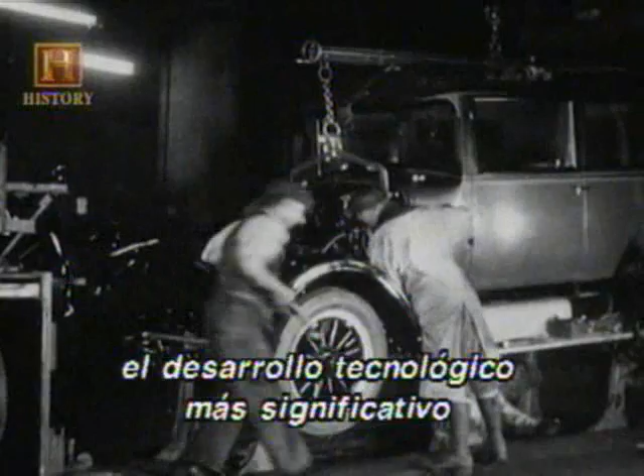I think the assembly line is the most significant technological development of the 20th century. Nearly everything that we use, we would not have it in the quantities we have it and at the prices we have it without the assembly line.

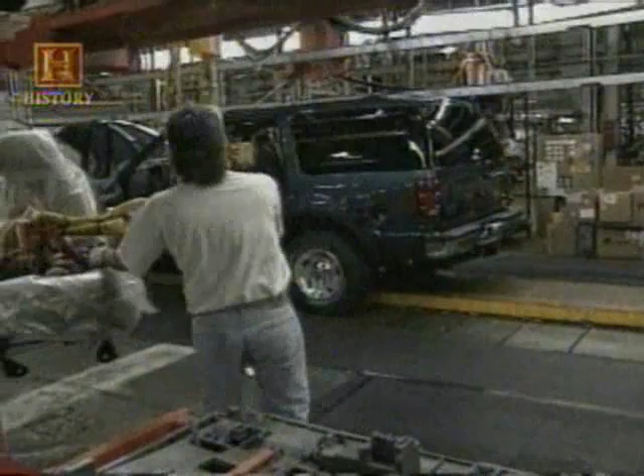I think the best way to define an assembly line is the way Ford did. He called it progressive production. Work moves to the person and moves past the person rather than the person going to the work. Parts are added until you come up with a final product. And that's what the assembly line is, essentially, work in motion principle.

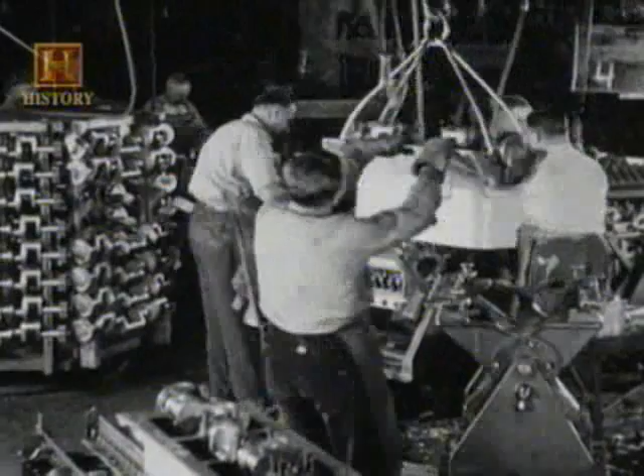Industrial society was highly advanced at the time the assembly line came into being, but once it came into being, it was so productive that very few things were made without the line after that. There are several factors that went into the making of the assembly line. The first had to be that the parts of any product that would be made on an assembly line had to be interchangeable.

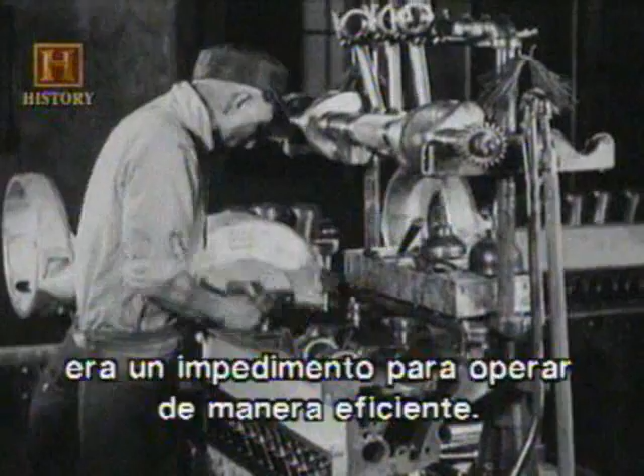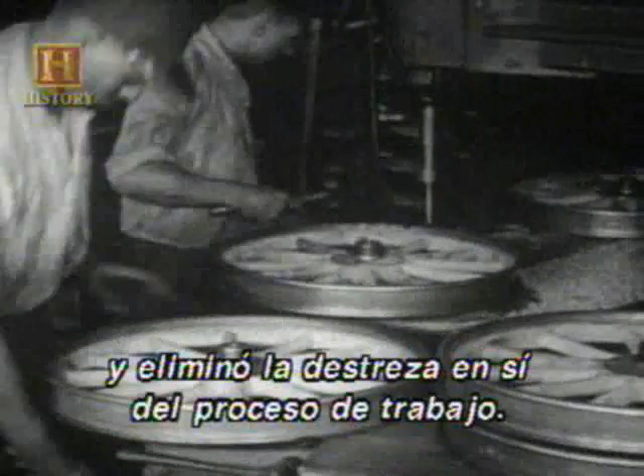Effectively, he Taylorized the work and took the skill out of the work process, dividing the labor, subdividing it again, so that a workman would do a smaller and smaller part of it. And doing the smaller and smaller piece of work, he could do it faster and faster.

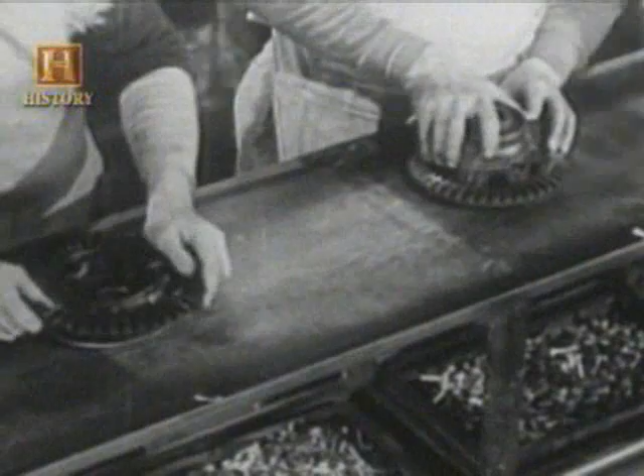Then they said that if this works with transmissions or it works with magnetos, what about engines? What about front axles? What about rear axles? And eventually they got all these subassemblies on the assembly line.

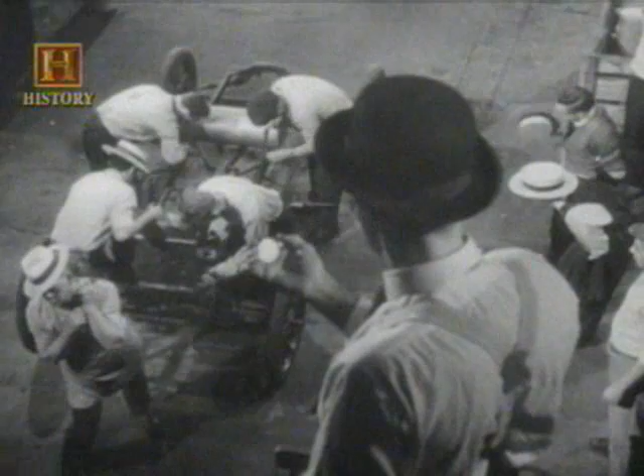Ford and Ford's engineers took all of these ideas and brought them all together and created what we think of as the modern assembly line, but it was really an amalgam of all sorts of other ideas, but nobody had ever tried to put them all together and use them to put together something as complicated as an automobile.

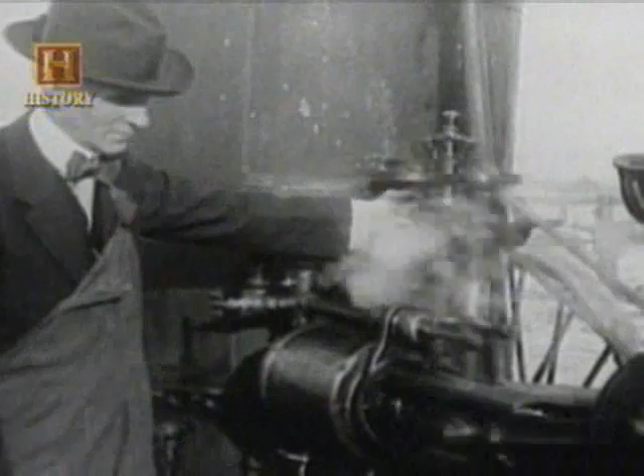Wondrous technology of the assembly line effectively was its undoing relative to labor.

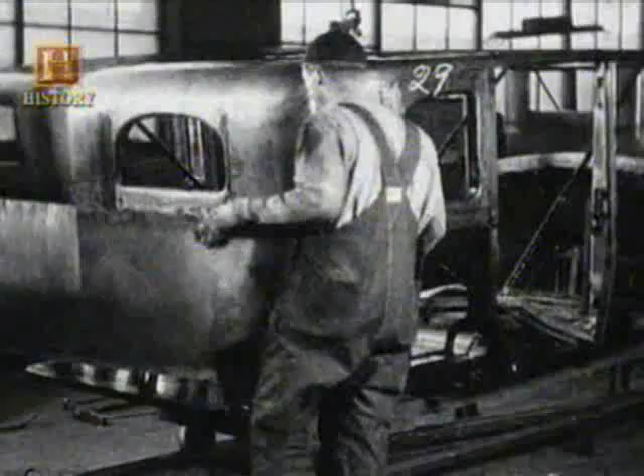It's boring, it's regimented, it's monotonous. It was very difficult to keep a lot of workers in these factories when they first started the moving assembly line.

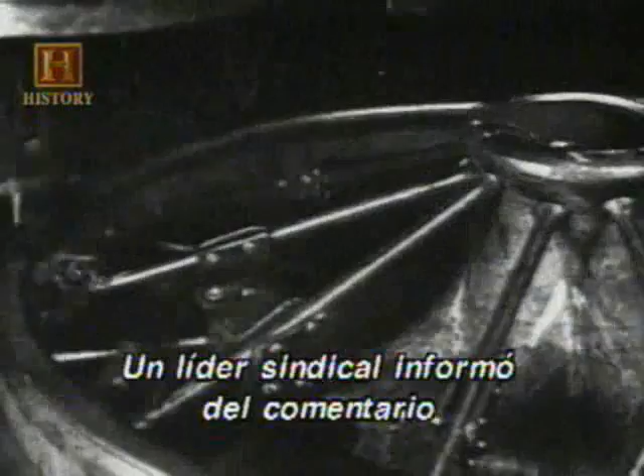A labor leader reported the comment of a Ford auto worker as saying, "If I have to put on nut number 86 more times, I will be nut number 86 in the Pontiac bug house." Work became degraded.

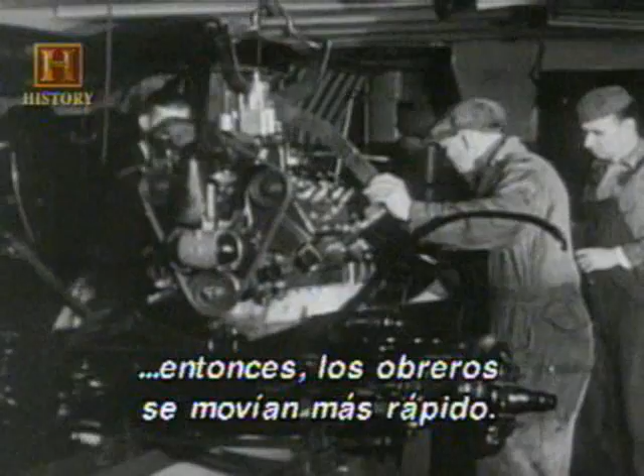A foreman in the Ford engine assembly plant talked about how in his shop, after they introduced line production, what he would do is he'd turn up the speed of the line a notch. The workers would move faster, turn it up another notch, turn it up another notch, and then the workers would scream and they'd turn it back one notch. They said we used to get 10, 15 more machines a day by doing that.

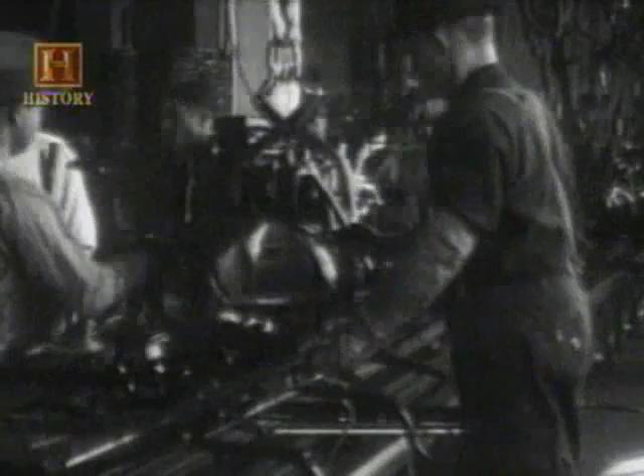Ford once said every part followed a predetermined place through the plant. If you had a person missing from that particular place, the whole system stopped. The Ford plant had 14,000 workers. With a 10% absentee rate, you have to have 1,400 extra workers to fill the assembly lines. People didn't want to do these jobs, and it required the bait of considerable increase in wages to keep people in those factories.

It worked. Turnover dropped, absenteeism dropped, and Ford workers sort of traded the high wages for the rotten work.

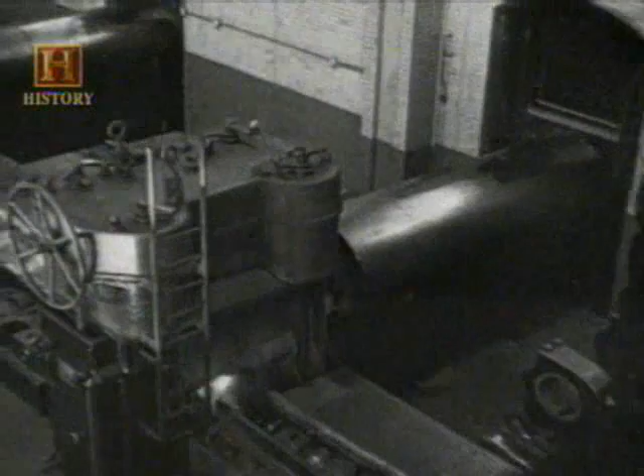I think what happens through the 1920s is that the line and the line speed and the regime of work in the factory becomes harder, faster, more ruthless.

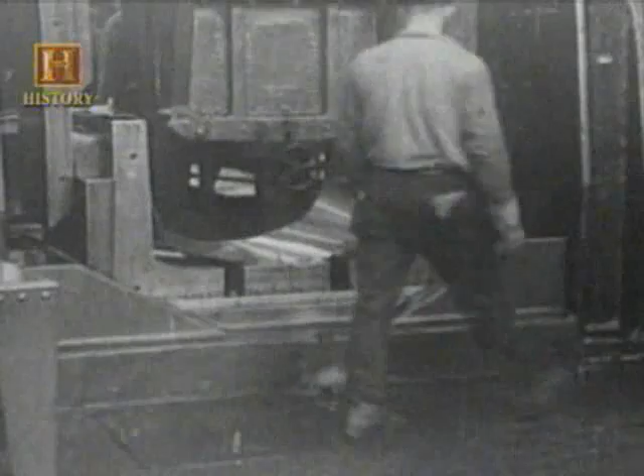Back in the days when he was a millwright, Ford Motor Company was the only company in the Big Three that had any blacks in skilled trades.

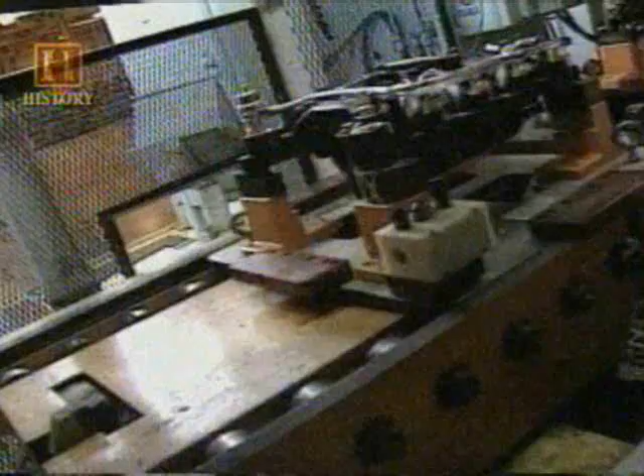He used to tell us some of the stories about some of the things that went on before the union got into the shop. If the production line was stopped for any reason, it was like an investigation, and it was nothing for a person to be fired, to lose their job, if they were found to be at fault. Prior to the union, if a person was seen spitting on the floor or smoking a cigarette, they could lose their job.

You had to take a little bit of everything. You got out there and did it. You could have been tired, you could be sick, but you had to produce. I came across an account of a woman who said that, my husband is not even allowed to leave to go to the toilet. They have a trough in the work area where he goes to urinate.

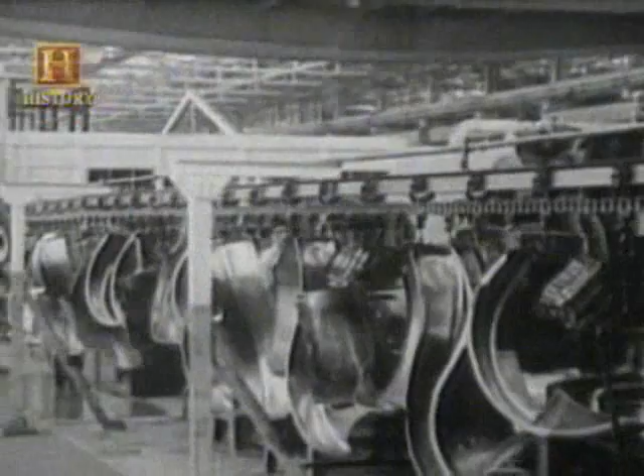First of all, it was a job. I had a job. The assembly line did a lot for a lot of people. It was a phenomenal thing, I guess is the best way for me to put it. The assembly line was a tremendous symbol of modernity, of productivity, of wealth.

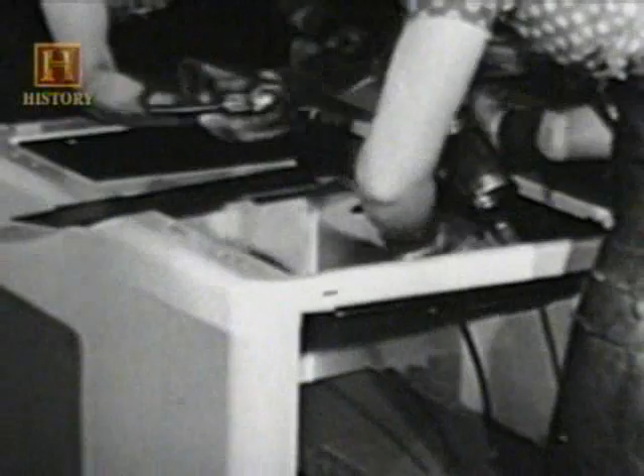There are new products coming on into the home, electrical appliances, which had been sort of experimented with at the turn of the century, but these were going in wholesale into American homes. You have companies like General Electric, Westinghouse that are beginning to make home appliances with moving line assembly.

The assembly line allowed not only more stuff to be made, but more complicated stuff, higher quality stuff, things like radios and phonographs, things that had once been fairly high-end, a kind of material abundance that people simply had never experienced before.

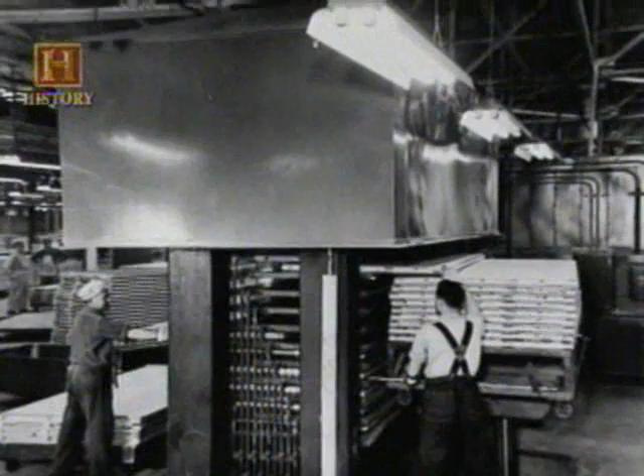Consumers, for the most part, have rejected mass-produced houses.

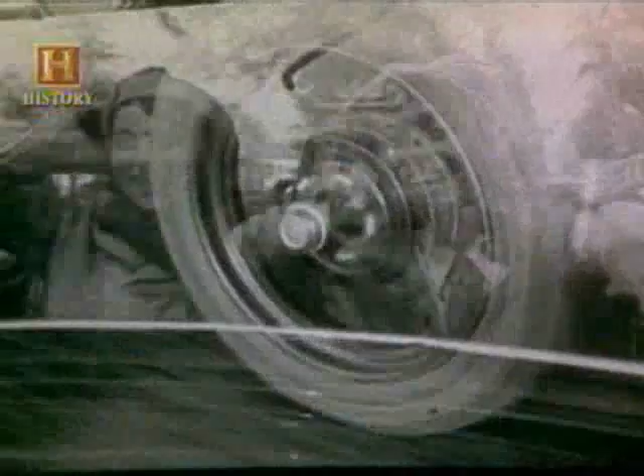We talk about car companies so much in this assembly line context because really that's where the assembly line was perfected and grew up, and it's where it matured.

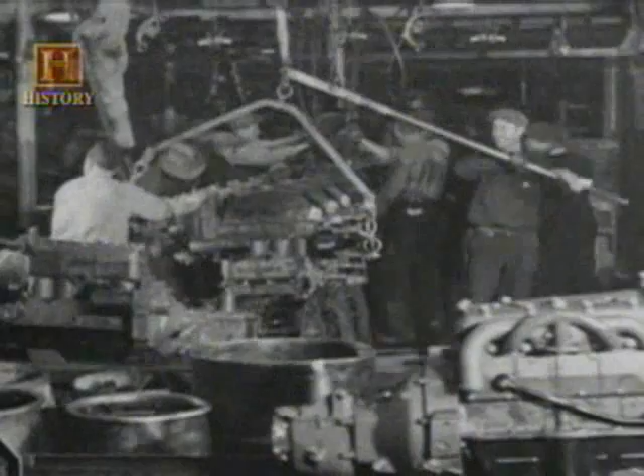It was an enormous, wrenching change to shut down his factories and retool them to produce the next car, which he called the Model A, a very different, much more modern automobile than the Model T. It was a colossal change for them.

Not only was it expensive, but there was also a tremendous personnel cost, and they threw a lot of people out, fired a lot of people, and brought in different people. When they begin to assemble the Model A, they have tremendous problems making the assembly line work.

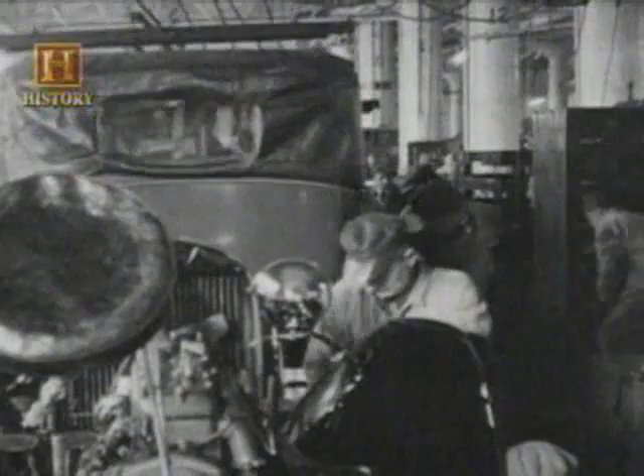General Motors was able to make those kinds of changes much more easily because they had never pursued things as far down that cul-de-sac as Ford Motor Company had.

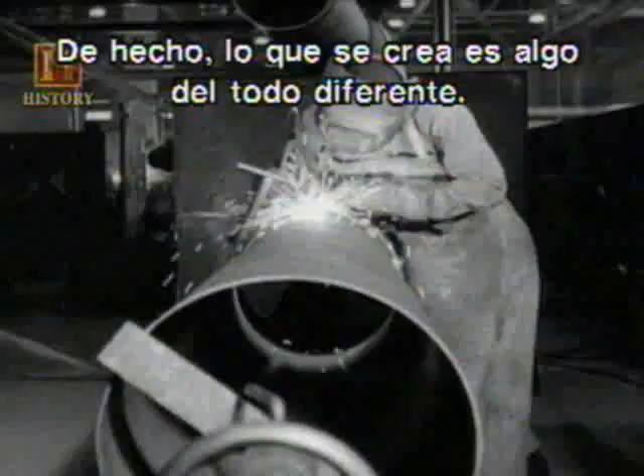Effectively, what you're doing is creating something entirely different. That process of conversion over to wartime industry is one where the whole shop floor is just literally in turmoil.

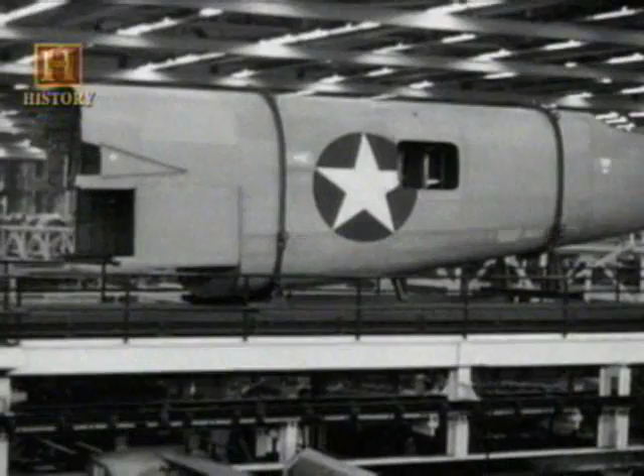If you look at the history of the war, you'll see that the United States created a tremendous amount of war material. World War II also sees the coming in of large numbers of women and large numbers of African Americans. Prior to that time, it was believed that neither women nor African Americans had the skills to work the machinery and the heavy equipment tied to the industry.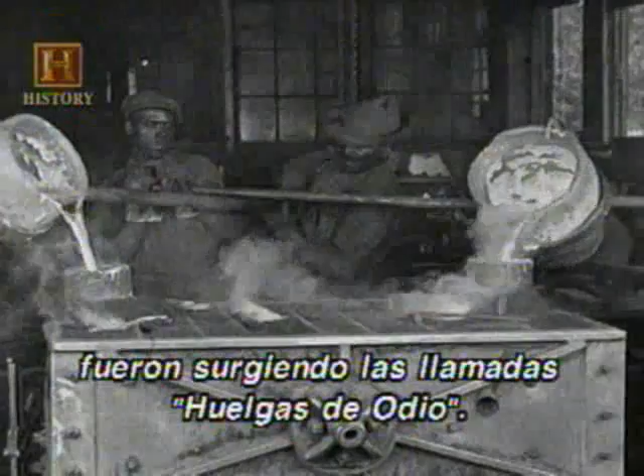There's a lot of contention in the auto industry through the war years. As African American workers are upgraded to the machines and the assembly lines, there are sometimes what are referred to as hate strikes - white workers who would go on strike because they didn't want to see the upgrading of African American workers. The same thing occurred with women workers sometimes.

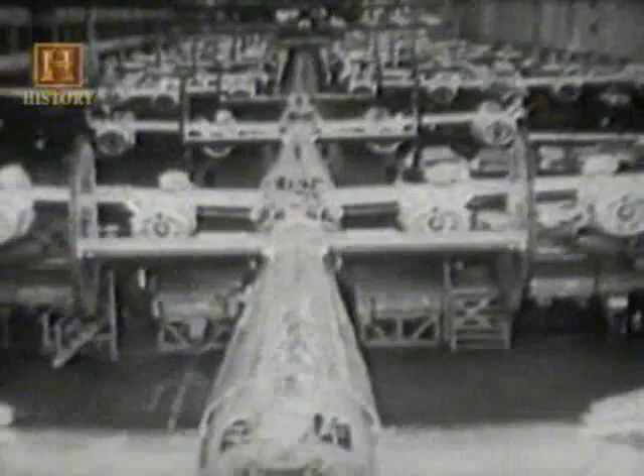One of the major reasons that we won World War II was because we were able to produce all kinds of war material, from tanks and airplanes to clothing and helmets, at a faster rate, at a cheaper price than any other nation on earth.

So we were able to build ships faster than the Japanese and the Germans combined could sink them.

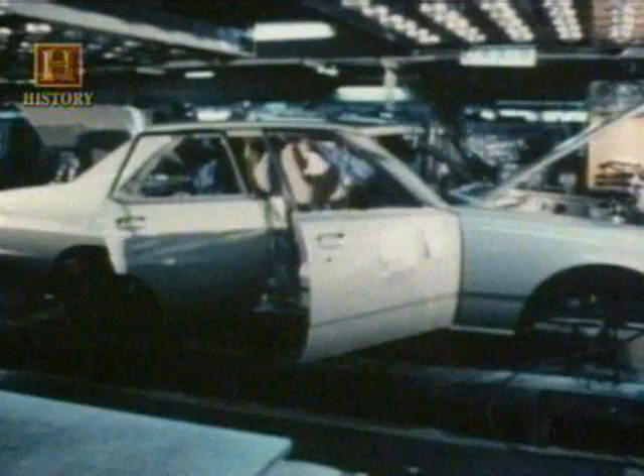I think you could say that Henry Ford invented the assembly line for the car, and that Toyota perfected it.

Después de la Segunda Guerra Mundial se decía que la productividad estadounidense era 8 veces mayor que la de Japón, que estaba devastado por la depresión y la inflación.

The Toyota situation in the post-war period, back in the early 50s, they really had nothing in terms of resources. It was a resource-poor country. They had no opportunity to waste. Any materials they had, they had to somehow use.

En 1950, Eiji Toyota, entonces un joven ingeniero japonés que esperaba reconstruir el negocio de su familia, pasó 3 meses en el complejo Rouge, la instalación manufacturera de automóviles más eficaz del mundo. A diferencia de muchos fabricantes de la época, Henry Ford no sentía temor de compartir el alcance sin precedentes de sus técnicas de línea de ensamblaje con otros industriales.

Ford's assembly line worked great when you had high volume and low variety, hopefully no variety, just one. But Toyota's situation was different.

En esa época la Toyota Motor Company estaba produciendo 1,000 autos mensuales, mientras que en el Rouge se fabricaban 1,000 autos diarios. Sin embargo, este no era el único problema de Toyota.

Here they are making 1,000 cars per month. And all those, they had to make all kinds of cars. They had to make trucks, big cars, little cars, limousines, fire engines, you name it. They had to make everything for the Japanese market.

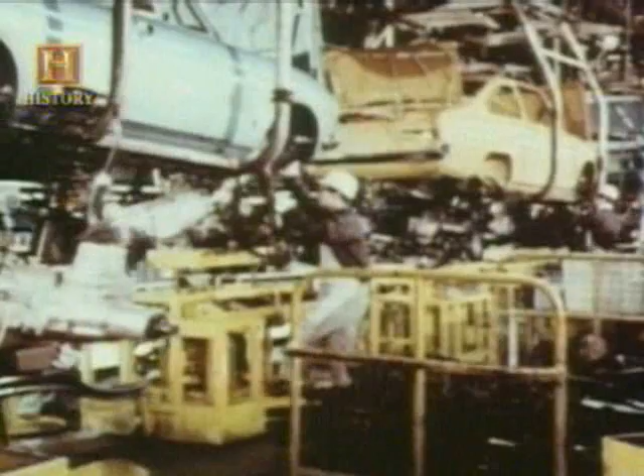Al contrario de las líneas de ensamblaje altamente mecanizadas de Detroit, Toyota construyó sus propias líneas alrededor de su recurso primario, el obrero. And to do that, they realized the most flexible thing in the entire operation are people. Not machines, not anything else, it's people.

The Japanese never went as far down this road towards making the worker merely a cog in the machine as we did. They were actually using their workers' mind power, and we had forgotten about that.

En lo que fue considerado un cambio fundamental en la técnica de la línea de ensamblaje, Toyota reorganizó el trabajo, redujo los desechos y le permitió a los obreros definir sus responsabilidades en un proceso llamado manufactura lean.

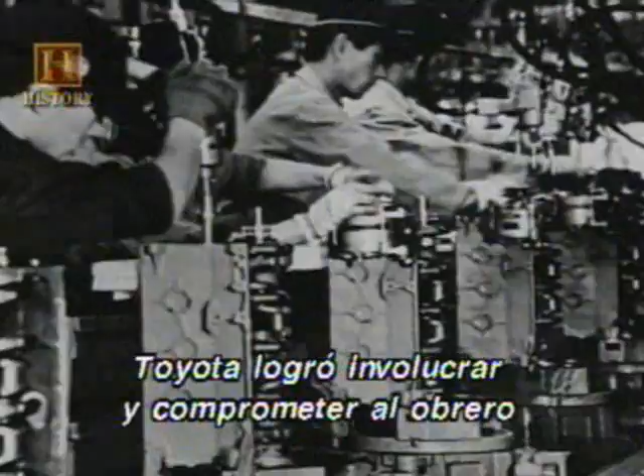Every job that you see on a Toyota assembly line has been slowly and steadily improved and fine-tuned over the years by every operator who's done those jobs. Toyota managed to involve the workers, to engage the workers, and to give them jobs that actually provide more fulfillment on the assembly line.

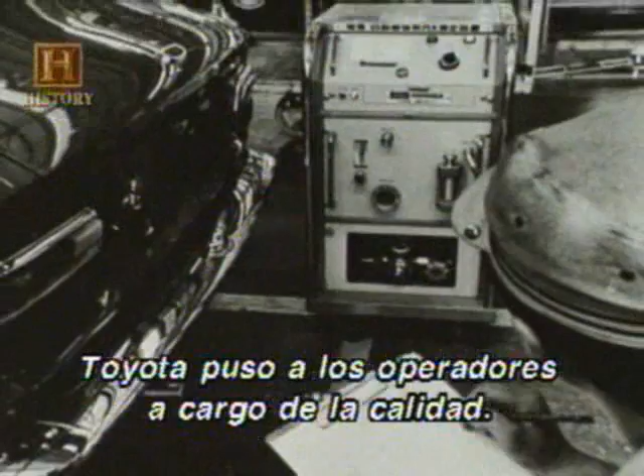If you have a problem, you stop the line right now. De ese modo, cada obrero en la línea de ensamblaje se convertía en un inspector. La calidad y la productividad aumentaron porque los obreros podían hacer mejores partes en un primer intento.

The productivity tends to be higher in a lean production plant because you are obligating workers to take on tasks which previously would have been carried out by indirect support staff.

Toyota también eliminó a ciertos especialistas de la línea de ensamblaje como los cambiadores de matrices. Una matriz es una dura pieza de metal de la forma exacta que el metal asume después de ser procesado.

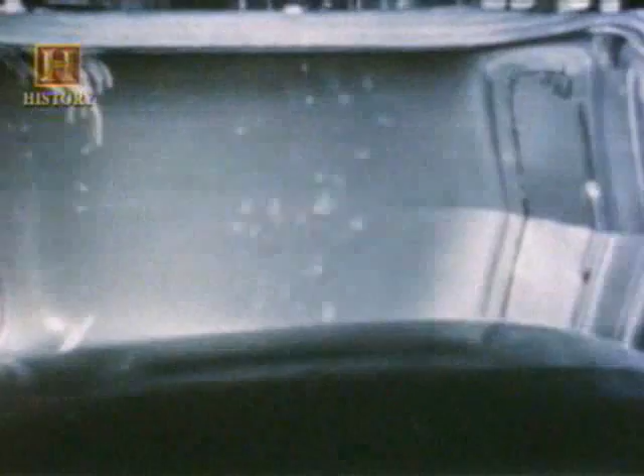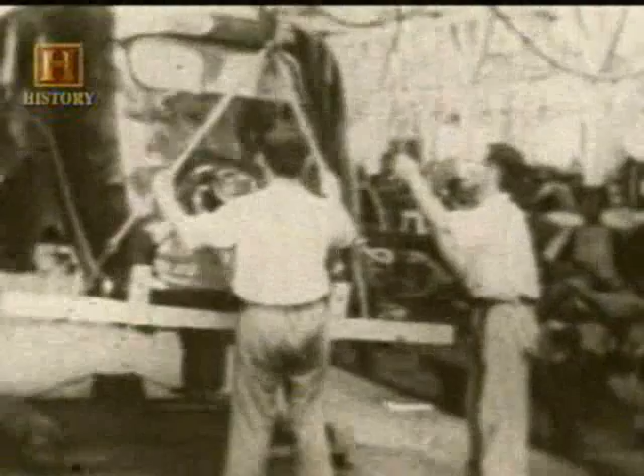They didn't know exactly what number of different products they were going to be making every day, so they had to be prepared to make those every single day.

Las líneas de ensamblaje de Toyota requerían que sus obreros fueran diestros, motivados e innovadores, ya que una vez que la producción fuera establecida, los obreros eran responsables de realizar mejoras continuas, un proceso que llamaban Kaizen.

You would remove 10% of the workers, 10% of the time, 10% of the resources that backed up that process, and force the remaining workers to figure out how to now get that job done with 90% of what they had before. And so that would be Kaizen, the continuous improvement element of it.

Once they had reestablished a certain balance, then you take out 10% again, and you continually ratchet downward the resources available. That is what makes it lean, because you have only the bare minimum necessary to get the job done, and you keep pressing it downward to see what you can achieve in the way of maximum efficiency in terms of productivity.

En los años 70, las líneas de ensamblaje de Toyota estaban preparadas para aprovechar las cambiantes demandas de los consumidores estadounidenses de autos más pequeños y de mayor rendimiento.

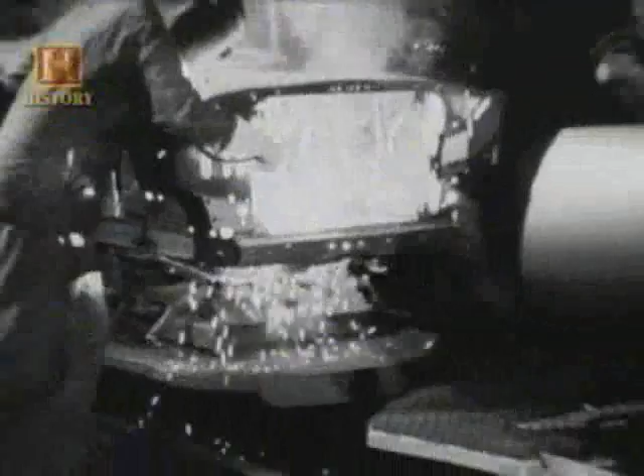I could get very upset sometimes when I could see that the quality of the steel, the things that we were producing, weren't really quality, and I knew they were going to be rejected.

I had no idea exactly what she was going through until I came to the Rouge complex and I was hired on by Ford. Sometimes at night I would wake up and it would feel like my hands were the size of a watermelon, and I'd have to open my eyes to look at my hands.

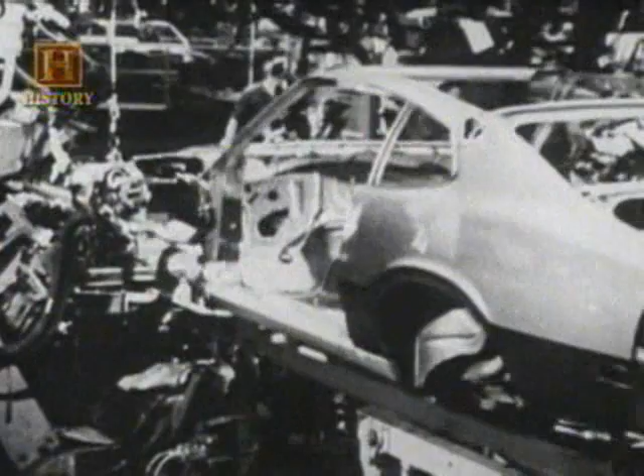Your body isn't made to work at that speed. It just isn't. No part of your body. And I took a tour of every plant in the complex, and when I got to the frame plant, my eyes welled up with tears to think my mother actually performed this work. I couldn't do it. You have to be strong to be able to do that. So your mind has to be strong. So I'm really proud that I'm still sane.

What they eventually found was that the application of these principles to the moving assembly line, which required extreme mechanization, went too far and pushed the human element in the production process to the extremes, and people rebelled against that.

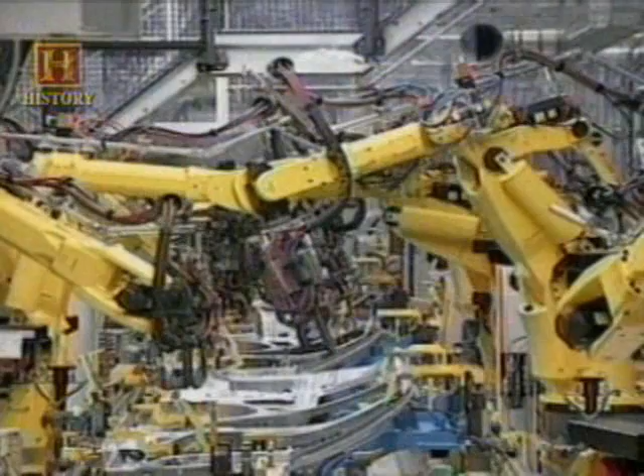The challenge is to make that assembly a lot more user-friendly to people. So as we future the assembly line, we really become a lot more people-oriented.

I've seen lines that were ran manually with people on every job turn to automated lines, and it's steady happening. So it's a big change just in the 6.5 years that I've been there.

Little did they know that science fiction would become assembly line fact in less than half a century.

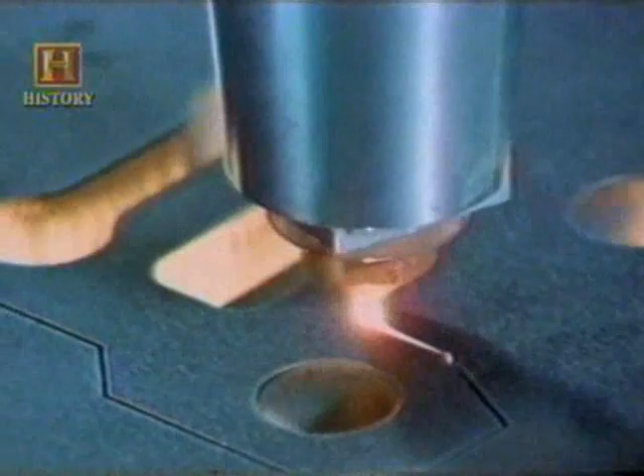The first kind of tasks that started to get automated were things like welding and painting, environments that weren't people-friendly.

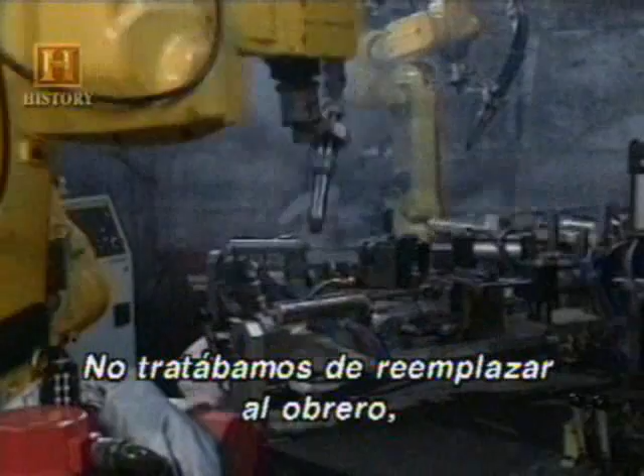We weren't trying to displace workers, we were trying to gain consistency, quality improvements, as well as actually benefit the worker by being able to take away tasks that weren't pleasant.

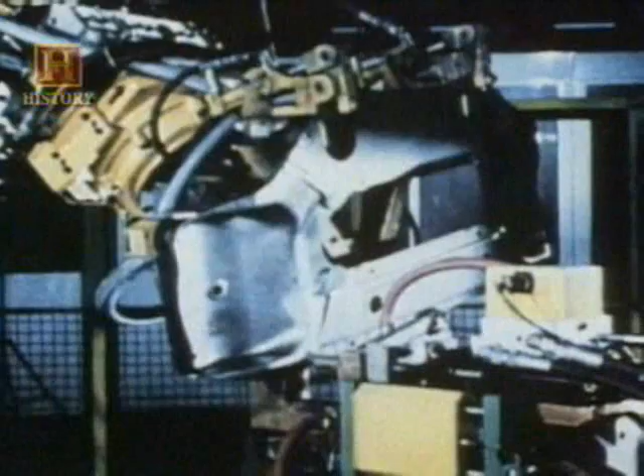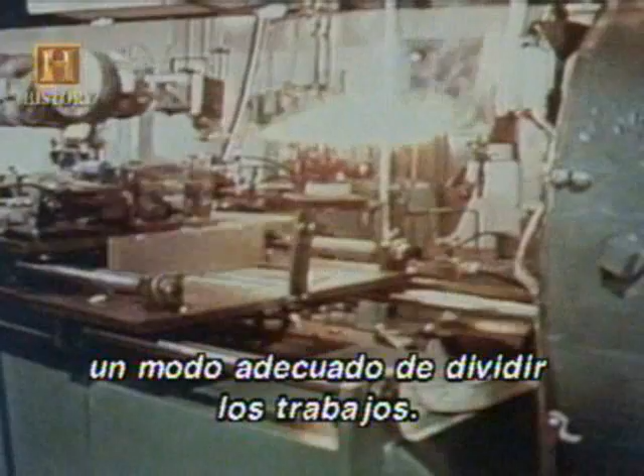We're learning that there are things which computers do better than people, and there are things that people do better than computers, and we're learning how to divide the labor so that we get the best out of the computer and the best out of people.

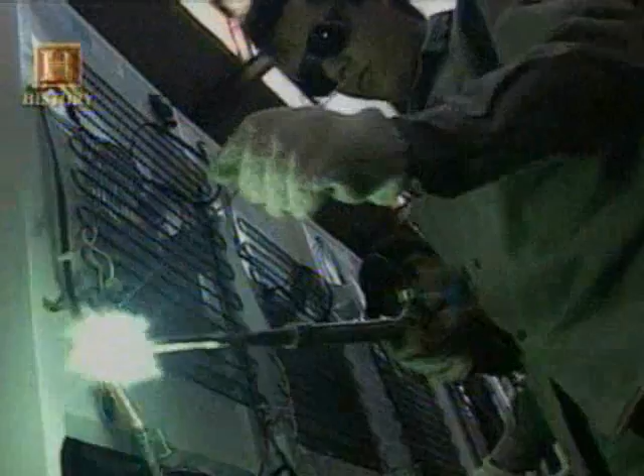We've come up with a program where every single one of our employees will be given a computer free of charge to make sure that the people have the right skills to be able to function in this new environment, because it is a new environment.

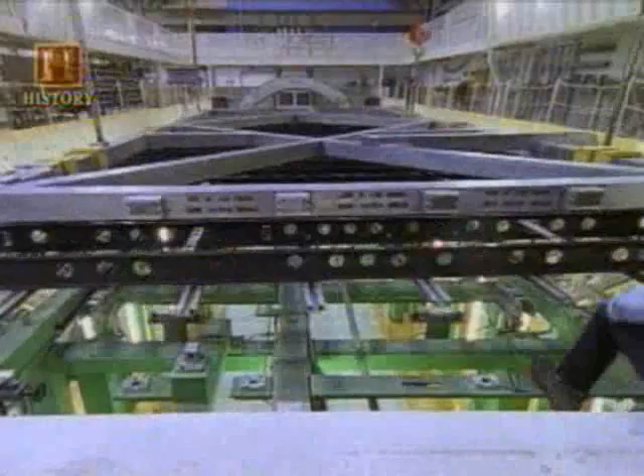You can imagine the process of building an airplane that size. Building every piece that you think will fit to every other piece, putting it together, finding it doesn't fit, going back and redoing another piece. I mean, the cost of building a complex part the first time is very, very expensive. So eBuild has a lot of advantages there.

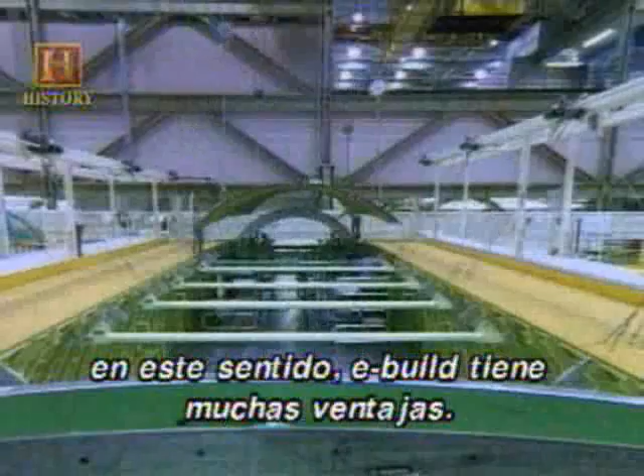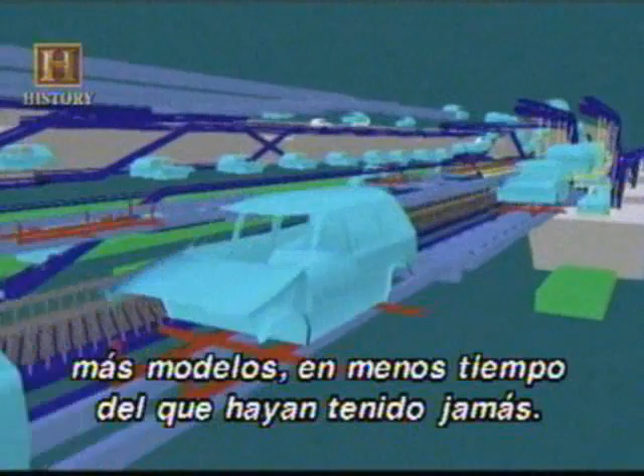The goal of the virtual assembly line is to reduce the time it takes to bring the real assembly line online, functioning, building quality product. That's a serious problem because automakers today are confronted with needing to come out with more models in shorter periods of time than they ever were before. The assembly line has to become a lot more flexible.

As markets break down into smaller and smaller segments, to be able to really maintain efficiency and productivity, assembly lines have to be able to produce whatever the market demands whenever they demand it.

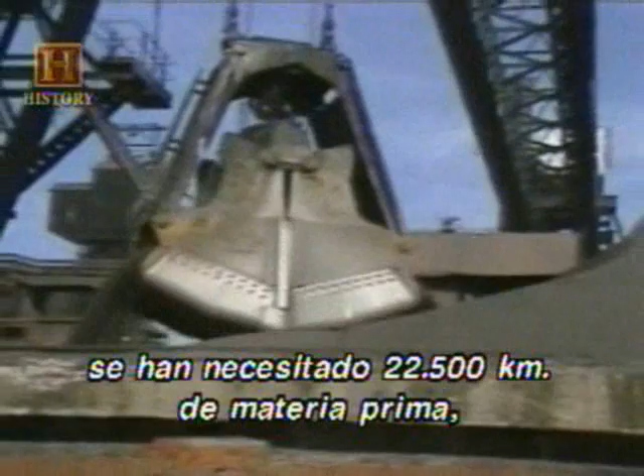It takes today, or historically in 20th century terms, something on the order of 50,000 pounds of raw materials through the refining and manufacturing process to produce a 3,000 pound car. Well, that means there's 47,000 pounds of waste in there somewhere. There's obviously huge opportunity to become more efficient as manufacturers and as an assembly line, and to become really a superior performer environmentally.

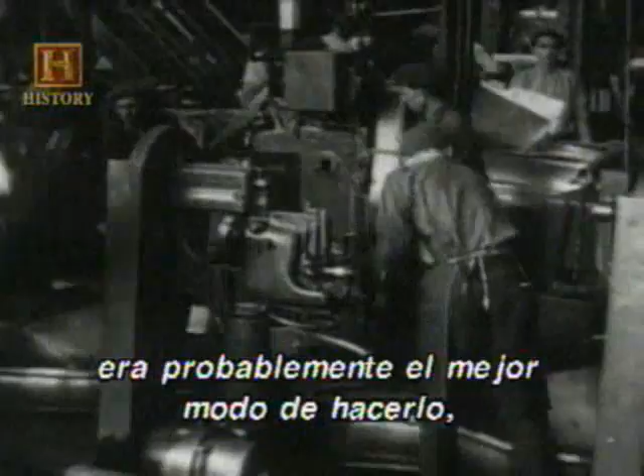On a global scale, we've got 150 plants in 26 countries. So if we do something well, it can be very powerful. What Ford invented was right for Ford's time. The way we ran production lines was probably the best way to run them at that time. We've got a whole set of rethinking to do now.